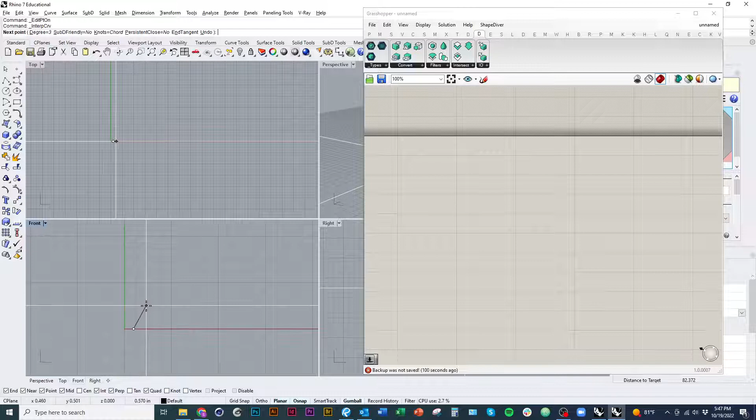So over here in my Rhino window, I'm going to draw a couple of curves to create some kind of mesh around. I'll just draw some wavy curve forms here. And I'm just drawing them in front view so they're kind of vertical. And we can go back and always change these later. Okay, let's start with that.

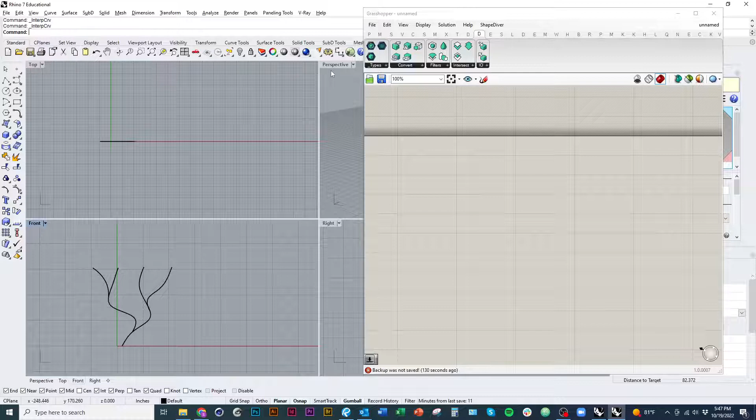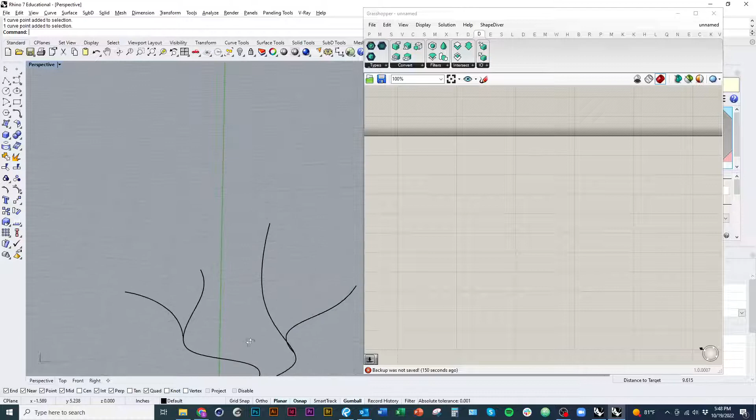So over here in perspective, I'll maximize. You can see they're kind of in 3D there. So we can also move them in other dimensions and have them be a little more three-dimensional, using those control points. And it's important that they're a little bit close, but they don't have to be perfectly touching down at the bottom and things like that for Dendro to work. Get those to touch in the center.

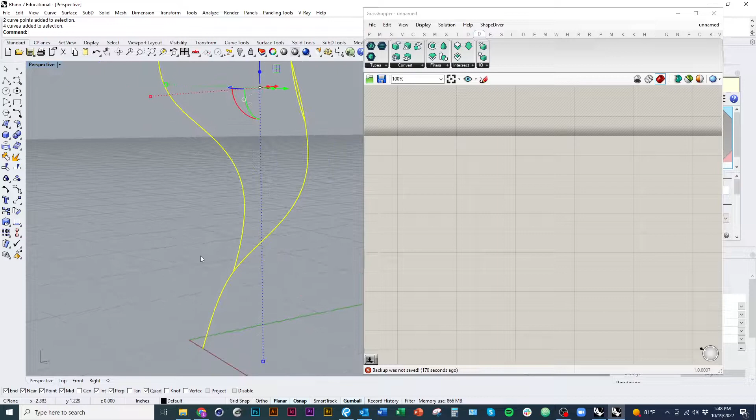All right, so what I'm going to do is take these curves. Doesn't matter how long they are. Again, doesn't matter if they're touching. You want them to be close where you want them to join, obviously, but doesn't matter if they're perfect. And then I'm going to put them into Grasshopper. So over here in Grasshopper, just get a generic curve component. Click that curve component there. Right-click and go to Set Multiple.

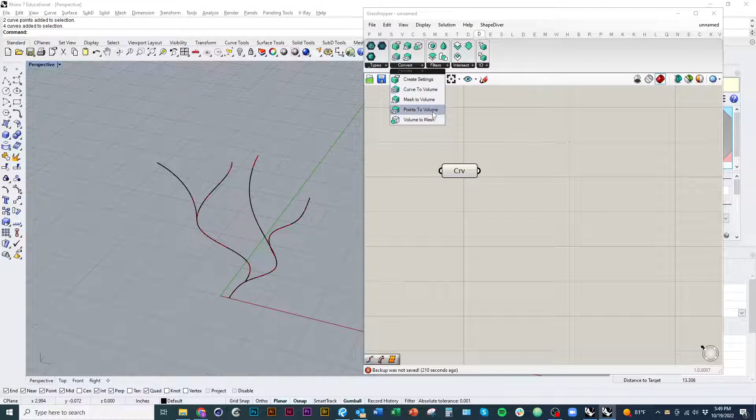Then what I want to do, so Dendro, again, can take either a curve or a series of points. So over here on the Dendro tab, this is the name of the plugin. If you go to food4rhino.com, you can download and install it. But over here where it says convert, we have a couple of different options. So I'll show you the curve version first. So that first option is going to be curve to volume.

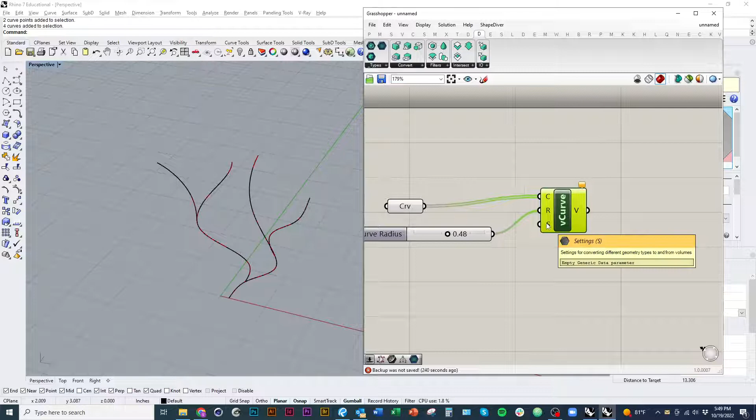So if I just go ahead and plug these curves into this component, then I have to set a radius for how large around each of those curves, kind of like the pipe tool, how large I want those pipes to go. And then finally, I also need to set some settings. Also under convert, go to create settings.

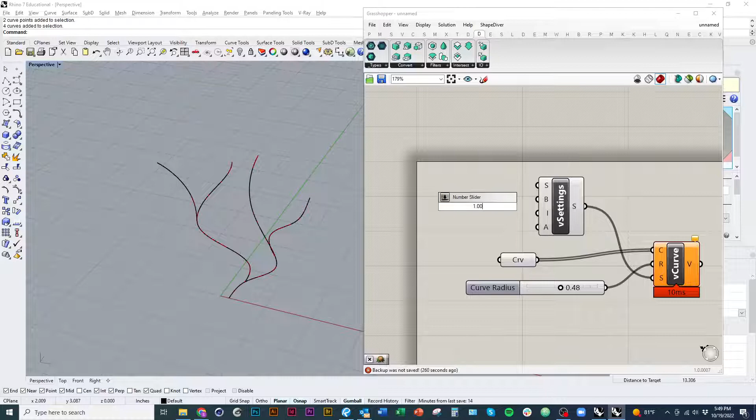And the main setting that Dendro wants us to input is the size of the voxels. In other words, the size of the subdivisions on the mesh. And there needs to be a certain minimum size. It has to be a certain degree smaller than the actual radius in order for Dendro to work. So I'll create another number slider. Here we go. It needs to be, I don't remember how much, but a little bit smaller than this number essentially for Dendro to work. As I drag this down, you'll see it'll disappear again.

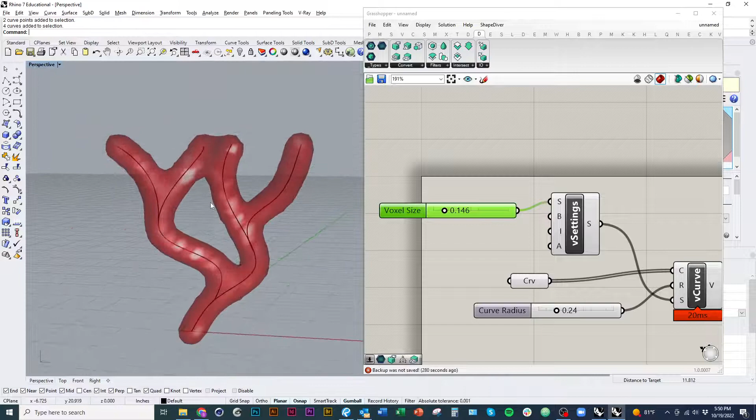Very small. But this actually does represent kind of the resolution of the mesh that Dendro is creating. So you can see right there, it's automatically creating this kind of single mesh. Now, if I were to go ahead and bake this, I can right click and just go to bake. So I have a mesh already. Again, that should be a watertight, I'll put in shaded, watertight joined mesh.

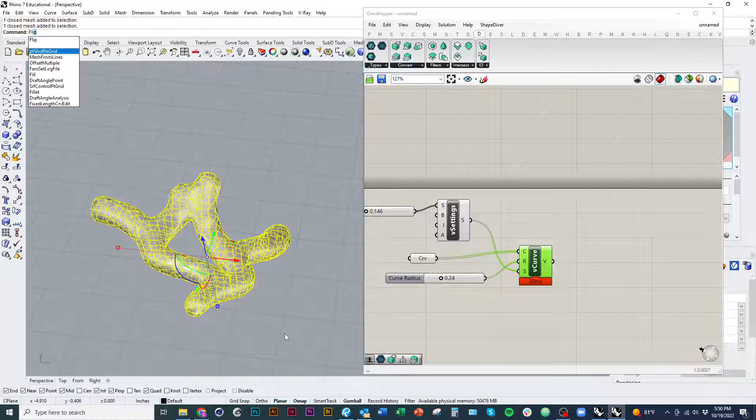For whatever reason, it usually seems to put the meshes inside out. So meshes, like surfaces, have a kind of inside and outside, or a direction that they face. So if I were to select this and just type in flip, now you can see it's not see-through anymore. But if you look at the lines of how it's subdivided, that's what this number is. So the smaller that number is, the smaller those little subdivisions on the face will be. And of course, the slower your Grasshopper will go, and the bigger your Rhino file will be, and all that fun stuff.

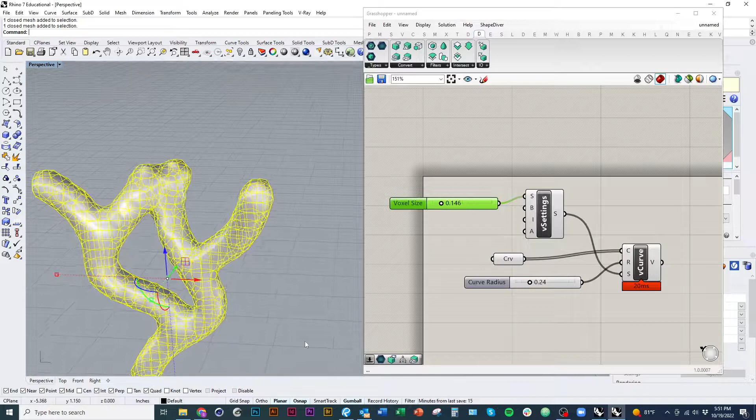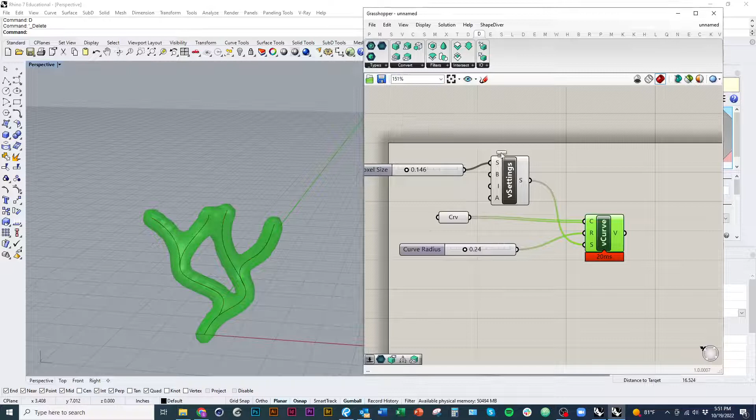So what if we wanted to make a version of this where it gets larger from bottom to top? So as it goes up, it's thicker. So instead of using curves, we can also use points using the points to volume tool in Dendro. So I'm going to go ahead and delete this one first of all. And what I need to do in order to get this to work is divide the curves into points. I can just use a divide curve to do that.

Obviously my curve goes into that. Now you can see because they're all different lengths, the points are at different spacings. What I want is to have the number of subdivisions of the curve relate to the length of the curve. So I can just double click, get a length component. That just tells us the length of the curve as a number. Then I'll get a division component, type in a slash in the search bar, and I'll divide that by a number slider.

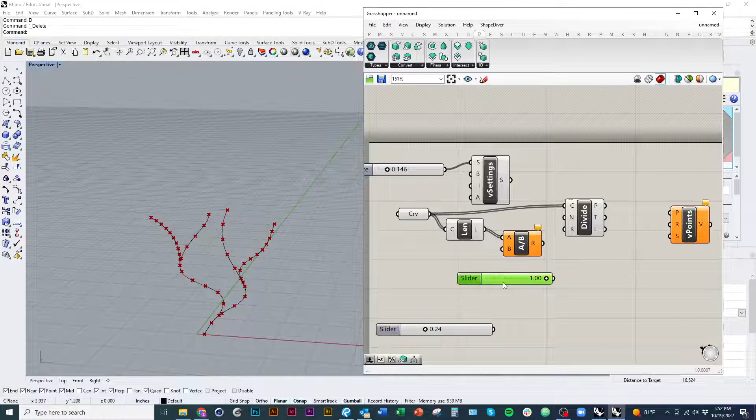1, plug that into the n. And so basically that number slider, as I make it smaller, you'll see that I'll get more points. So this kind of represents how far apart the points are on the curve. So the smaller that number, the more points I'll have. So we'll start with something like that.

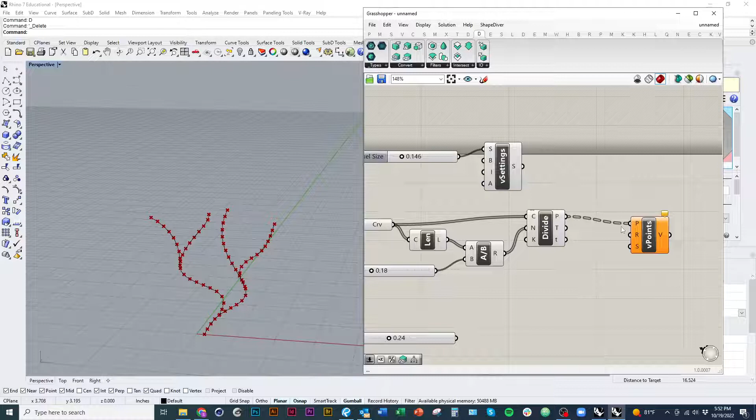So I'll go ahead and plug these in. Now, one thing I do want to do, because I want them all to be joined together, it's not like I want a separate mesh for each curve or each set of points. This dash line here means that I have a grafted list. I want that to not be grafted. I'll just right click on the P and go to flatten. Now I have a solid line.

And I'll just use the radius and the settings that I used before. And now you can see it's doing pretty much the same thing it was before. It's joining them into one. But if I wanted to make it taper from top to bottom, I could give it a range of radii to make it taper along the length of the curve.

So in order to do that, what I want to do is deconstruct point. Deconstruct, not construct. So I want the one that says deconstruct, that goes X, Y, Z. And if you read the little description, it says deconstruct into its component parts. That's what I want. So this is going to deconstruct each of the points on the curve into X, Y, and Z components.

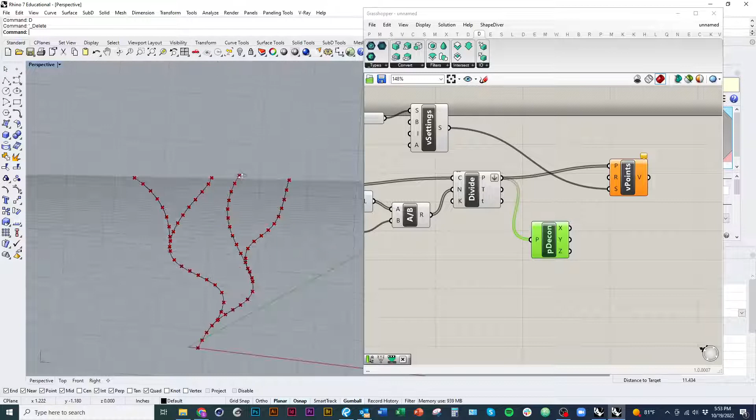So it'll tell me basically how high off of the 0, 0 of my file each point is. And I can use that to control the radii. In other words, however high my point is can relate to how large the pipe around that curve is going. So I'll get a remap and remap the Z values to new numbers to control those radii. So the Z is going to go into my values.

I also want to get a bounds component. This will give me the minimum and maximum domain of my Z values or my height values. And then I'll get a construct domain, just the one that's 0, 1, not the construct domain squared. So I'll take whatever these Z values are from start to finish. They go from 0 to about 3. And I'll remap them to numbers that are closer to the radii values that I want to use.

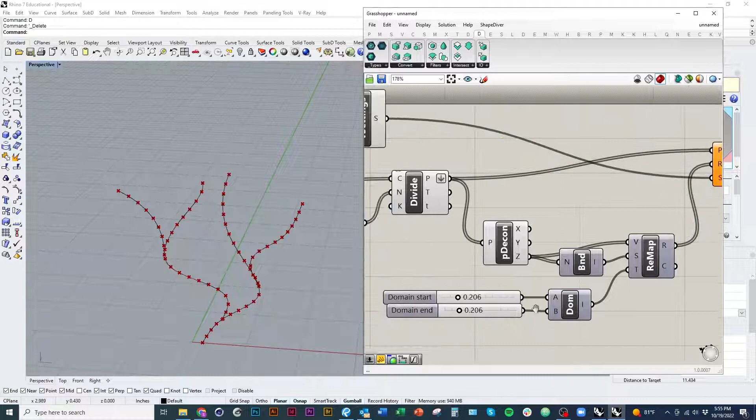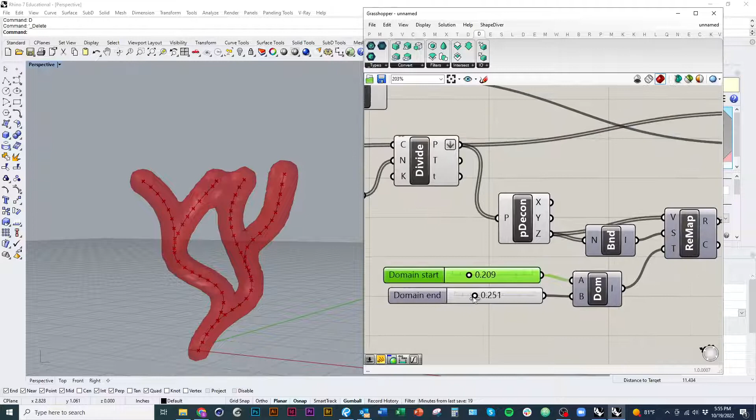So let me copy paste this slider here. And we know the minimum has to be a little bit larger than that minimum voxel size. And then I'll plug that into my radii. All right, so you'll see that the lower number is going to change the size of the points that are lower down in the Z dimension of my curve. And of course, when I go below a certain size of this number, they'll actually stop making a mesh around those points. And then as I move this slider up, you can see that's controlling what's happening on the larger end. And so I can get it to taper in that way.

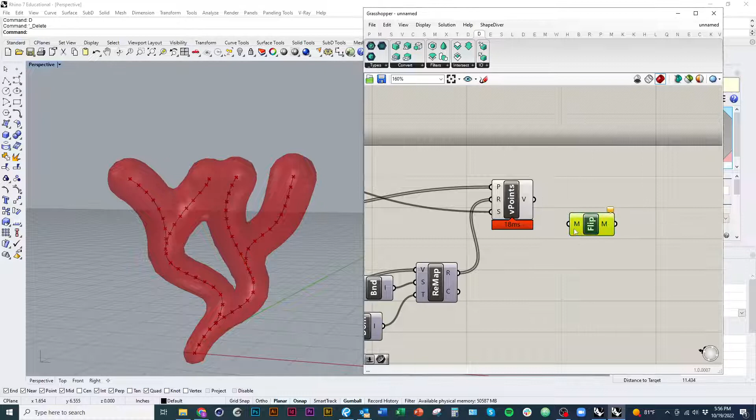And the other thing, just real quick, display. I'm going to turn on preview mesh edges. Here we go. And then, again, I need to flip the mesh. This may or may not be a plugin. I'll just type in flip. There you go. Mesh flip is what I want. So again, it's kind of turned inside out, but that'll give me a preview of how large those subdivisions are.

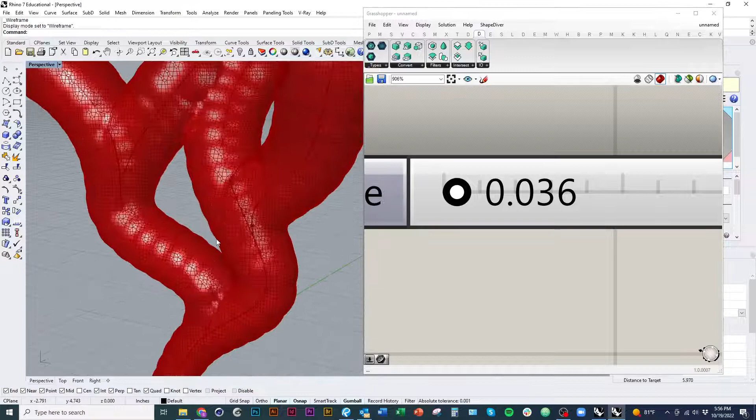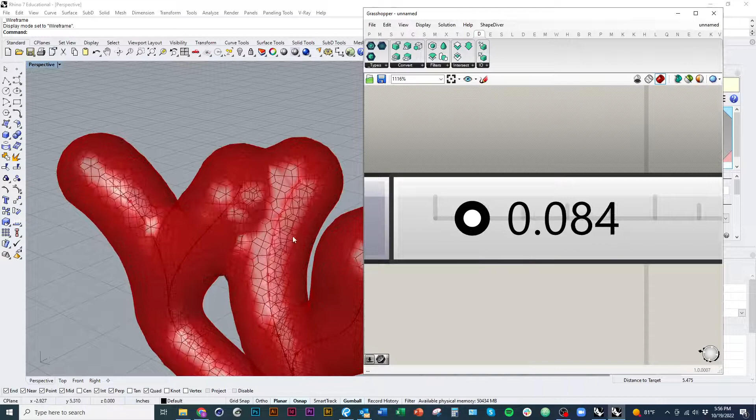And now if I make it smaller again, that's going to give me a higher resolution. But you'll notice that if you make it too small, you get these little humps, which basically are like it's making a sphere around each point that I've divided the curve into. And you'll see some of these transitions become more pronounced the lower the resolution of my mesh. So that's a number that you want to balance so that it appears to be a smoother transition between multiple curves and also between the points along the mesh. Again, you can also change that value by moving this slider around.

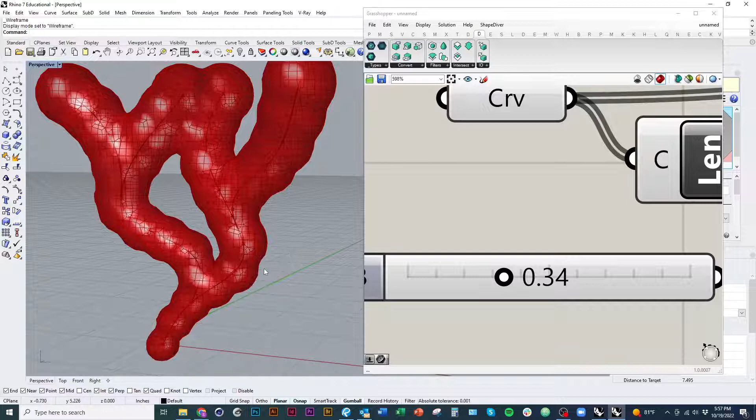So higher numbers will express individual points as spheres more. It'll give you a more segmented looking thing. And then lower numbers, meaning more points, will smooth that out a little bit more.

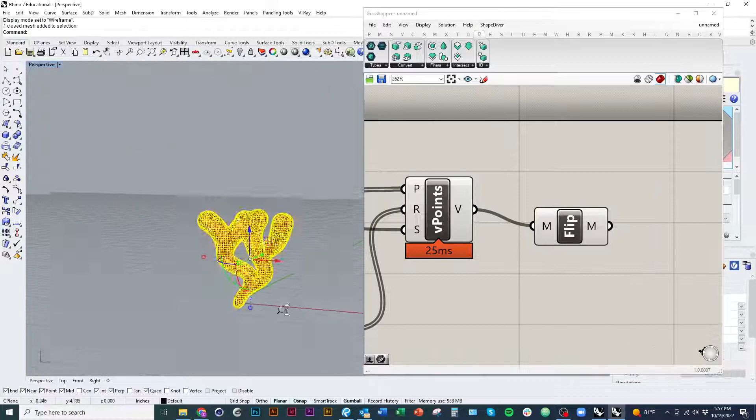And then when you're done, you can also just bake that. Oops. There you go. And you'll see that it's one continuous solid mesh. So really super useful for those organic forms. All right.